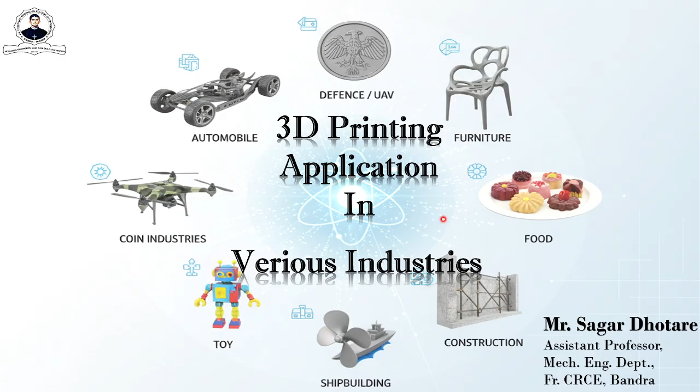So in this video we will discuss the different types of applications we need to go through, and there are two applications we are currently discussing in today's session.

Here are the various applications shown which need to be discussed: automotive, defense, coin, household appliances industry, toy industry, unmanned aerial vehicles, furniture industry, construction industry, and food industry.

Today we will cover the automotive industry and defense industry, or you can say defense sector.

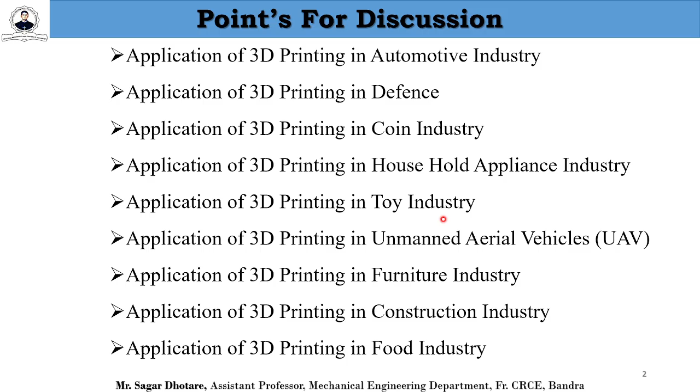The most important reason we need 3D printing in the automotive industry is that the automotive industry has a long milestone globally for innovation, driving progress in engineering, manufacturing, and design. So we are using this 3D printing technology in the automotive industry itself.

The benefit related to 3D printing which has been used in the automotive industry: originally 3D printing has traced back to 1980. The technology started in the 1980s.

Based on that, the first 3D printed automotive technology was developed, or you can say implemented, in the 1990s by General Motors, Ford, and BMW. They used SLA, FDM, and SLS technologies to create polymer based prototypes. Initially, in the automotive industry, they were only using it for prototype manufacturing.

Before discussing the historical milestones, we will first discuss the basic role of 3D printing in the automotive industry. On the screen there are five initial segments shown.

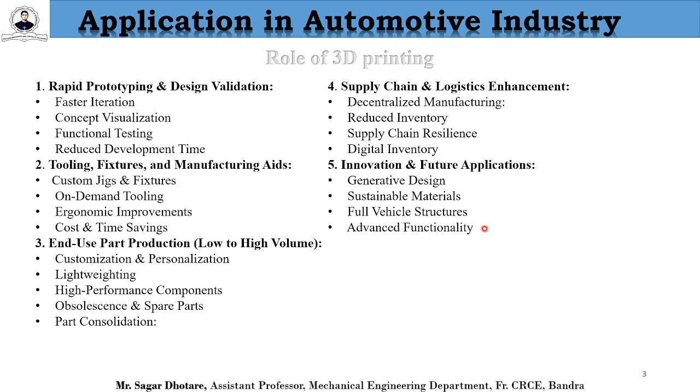So we can have different case studies to understand the application of 3D printing in the automotive industry. There are various companies like Ferrari, BMW, Ford, Local Motors, Audi, Porsche, Bugatti, Volkswagen, Mercedes. They are using 3D printed parts in their vehicles.

With this personalization, the German automaker is making a cue for the motorsport sector, where customized driver-specific seats are fitted in the vehicles. In the middle of 2021, it was fitted in the vehicle.

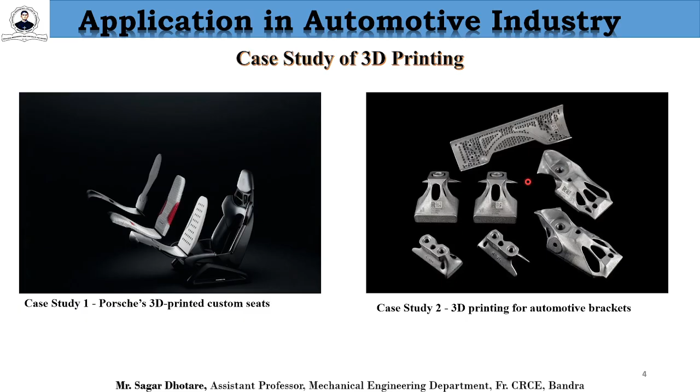Virtual design testing has been a key part of the design process for this high performance vehicle. During virtual testing, more than 500 cooling and aerodynamic 3D designs were analyzed to enable the team to reach the downforce, braking and cooling targets.

Once the most promising designs were identified, Ford's engineering team used 3D printing to create prototypes. For instance, the team 3D printed 10 test designs and checked the quality, and the design they developed and optimized was a component very useful compared with the traditionally manufactured component.

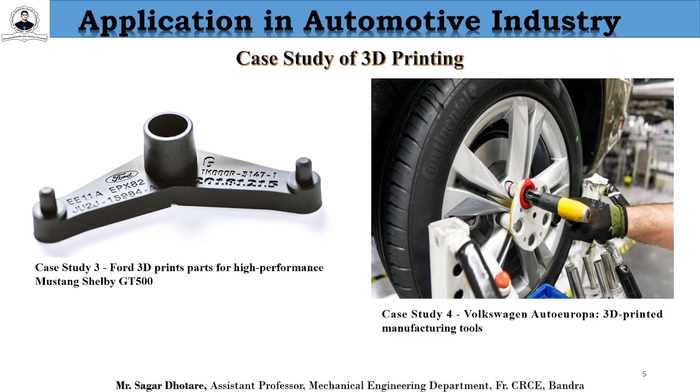Similarly, they are using 3D printing to manufacture different hypercars, which have been published and manufactured with the help of this 3D printing technology.

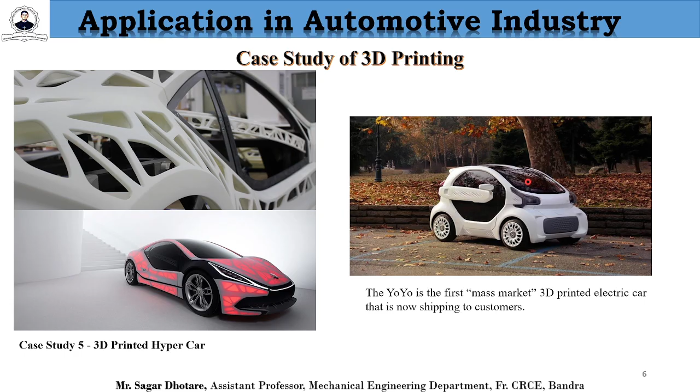When the Toyota Yaris GR was released, engineers at Forge Motorsport noticed new opportunities to improve the inlet duct design by moving the airbox opening and increasing the overall size of the part. This would reduce fluctuations in intake air temperature (IAT), making it easier to anticipate engine performance, and reducing the average temperature overall.

So with the help of SolidWorks they created the virtual design, and with 3D printing they manufactured it. They cut down the temperature from 40-45 degrees to 35-36 degrees, which increases the overall performance of the vehicle.

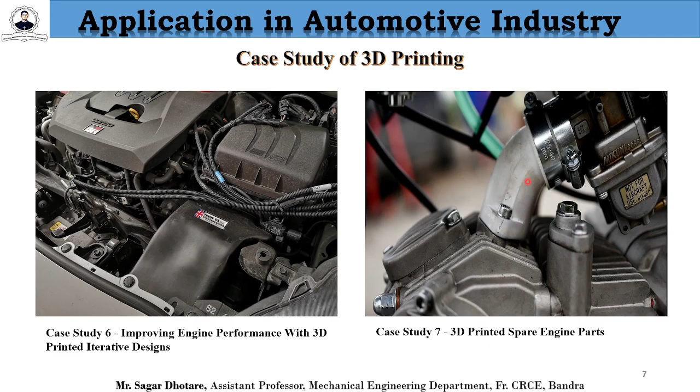Now the next application: defense application. In defense applications, there are a few important points regarding why 3D printed components or 3D printing is important.

In military applications, innovation and continuous development are needed. There are various aerospace applications, or you could say ships, which require lesser weight so that they can easily travel greater distances in minimum time.

For that, countries like US, India, Israel, China, and NATO have made alliances and used 3D printed drones, novel structures, and aerospace parts for defense applications. There are 8 main roles of 3D printing in defense.

First is rapid prototyping and system development, which can accelerate the R&D cycle, creating new weapons, components, and vehicles with minimum time.

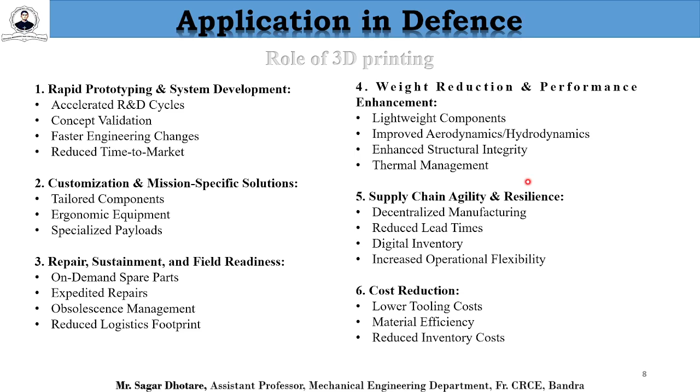Next is advanced materials and complex geometry. We can manufacture complex geometries with materials like aluminum and titanium, high performance alloys like Inconel, as well as ceramics, composites, and polymers, so components can withstand extreme conditions.

Intricate design allows critical components unable to be manufactured with conventional systems to be made with 3D printed systems. We can also combine different materials to manufacture multi-property components with a 3D printer.

Then training and simulation: nowadays in the US and UK, forces are trained with virtual VR and AR systems, as well as 3D printed realistic models of enemies, so they can practice close combat and other training processes. We will see a case study on that also.

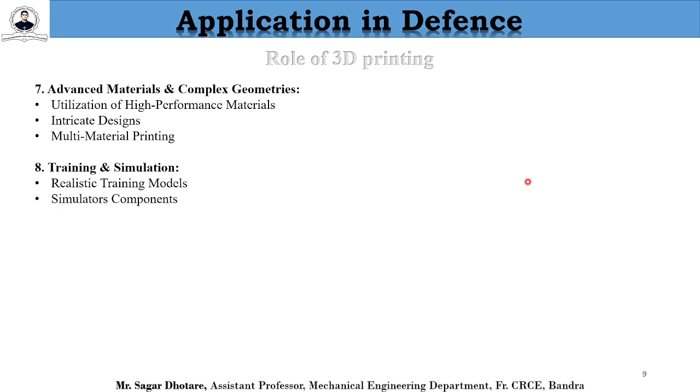Now for a few case studies. The first case study is the first 3D printed firearm part, the M16 rifle lower receiver. This was the first time 3D printing was used in a defense application. In 2013, an American gunsmith manufactured this 3D printed part, the AR-15 M16 rifle lower receiver, for a .22 caliber pistol, using solid metal.

The bullets used work similarly to conventional machines, with similar performance. On the right side is the Liberator, the first 3D printed single-shot handgun, manufactured in 2013, on May 6th.

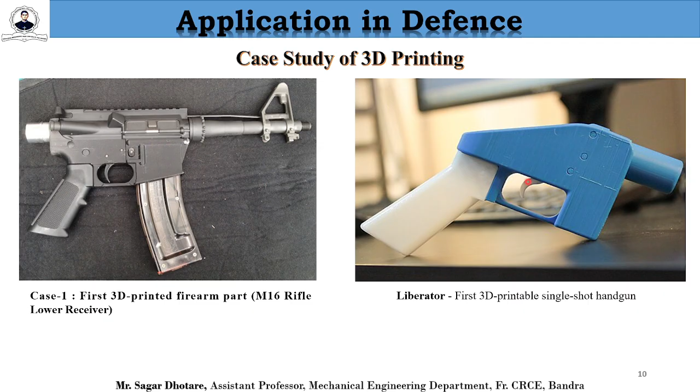During COVID, it was very difficult to supply material, or spare parts for the army, navy, and air force. In COVID 2019, the French military created the largest 3D printing farm in Europe. They created different types of components, which were spare parts required during this COVID situation.

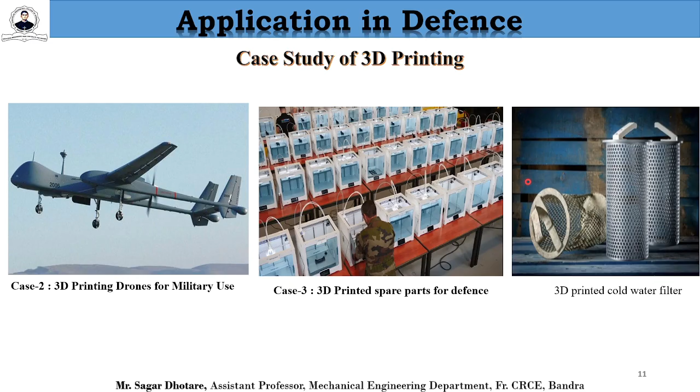Next is tools and equipment enhancement. In another case, the Royal Netherlands Air Force manufactured a customized turbine wrench, as shown on the left side, with the help of 3D printing technology. They used CF10 and igus iglidur I150-PF filament to manufacture this 3D printed part.

When manufactured with steel, or conventional manufacturing methods, they used a complete 12 weeks lead time to manufacture this component, at a cost of around 1100 euros. But with the help of 3D printing, they manufactured this component in 13 hours at a cost of only 24 euros. So the performance is up to the mark compared to the originally manufactured component.

Another use for equipment purposes is the radio GPS bracket fixing, a communication vehicle fixture for radio communication on vehicles like motorcycles and quads during missions. With the help of 3D printing, they manufactured this whole system, and approximately reduced the cost by 80%.

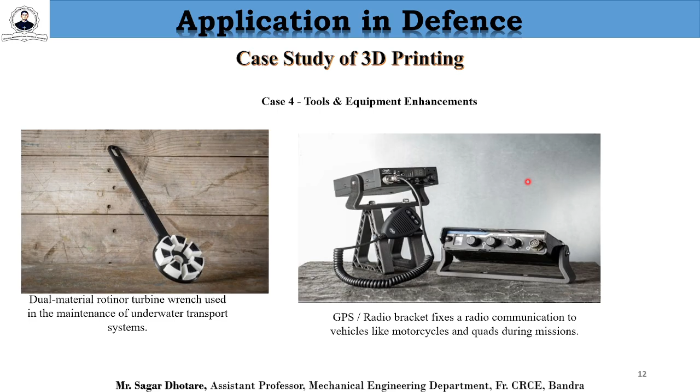Next application, a very important one: medical and humanitarian support during war. As we know, in war, due to explosions and other events, soldiers and civilians can lose their hands, feet, even their jaws. So with the help of 3D printing technology, we can support these issues with 3D printed parts. In the figure, you can see prosthetic limbs and arms for soldiers manufactured with 3D printed parts by the US Navy using various materials.

In another case, in the 2015 Nepal earthquake, some refugees were trapped in Kathmandu, where clamps, cords, and wire pipes were manufactured with the help of 3D printing technology, specifically FDM technology, and they saved over 100 people in that area.

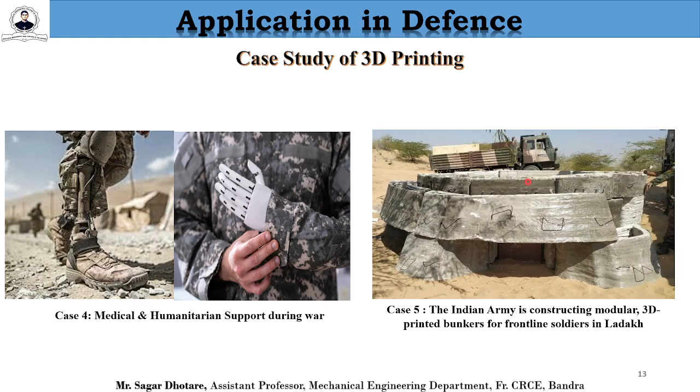Next application: the US Navy has a huge class submarine named Virginia. The US Navy has manufactured the submarine's propeller blades with the help of laser powder bed fusion technology, and also with CNC machining. They use materials like titanium and Inconel 718, which achieve an 80% reduction in weight of the blade, directly contributing to increased speed of the submarine. They can utilize these newly manufactured propeller blades and shaft to improve operation, with 50% faster production compared to casting. Their manufacturing or repair has been accelerated with the help of 3D printed components only.

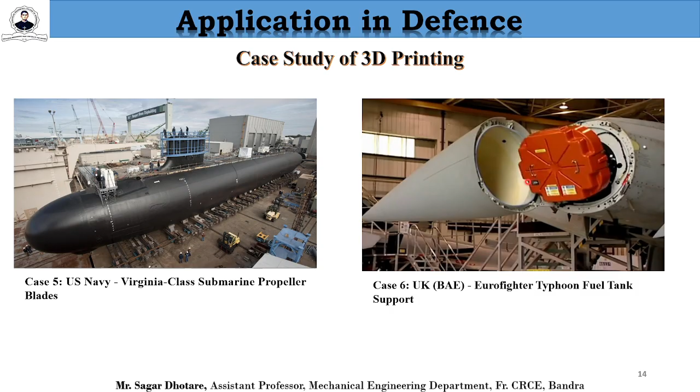Now, India has used 3D printed components for the inlet duct in Tejas. Our Defense Research and Development Organization, DRDO, applied direct metal laser sintering to produce the air intake duct for the Tejas light combat aircraft in 2020. The utilization of Inconel 718, a high temperature nickel superalloy, for the DMLS process enabled the creation of a duct with highly complex internal geometries that are impossible to achieve with traditional manufacturing. This led to a significant 8% improvement in aerodynamic efficiency due to smoother airflow and reduced turbulence. Additionally, a 50% reduction in production time accelerated the aircraft development and production schedule. This case study demonstrates that the utilization of 3D printing has been accepted by India in our defense system, and it can also be utilized for fighter jets.